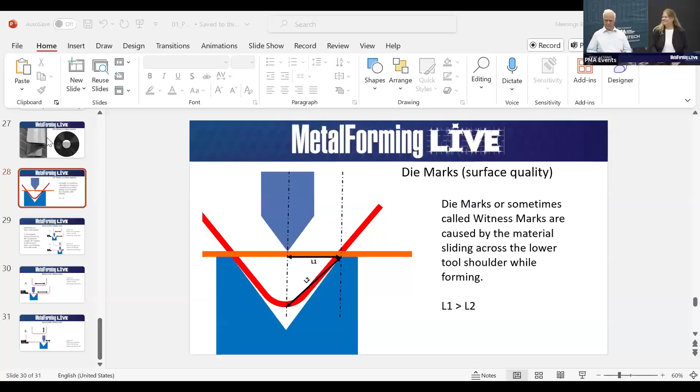Here today, we're going to outline some challenges fabricators have to take into consideration when assessing recipes for successful bending solutions. The first and most important is the V opening.

Too wide of a V opening causes excessive spring back, and more importantly, causes excessive spring back variations. A too narrow V crowds the die and exaggerates the typical metal thickness variations. The additional force needed also can overload the tooling.

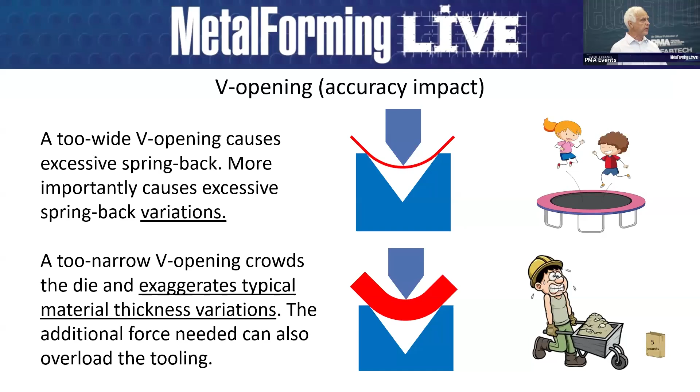The minimum V opening of 5 times metal thickness and the maximum V opening of 12 times metal thickness must be respected for good bending results. The ideal V opening, or the sweet spot, is about 8 times the metal thickness, or for 1/4 inch plate, about a 2-inch V die.

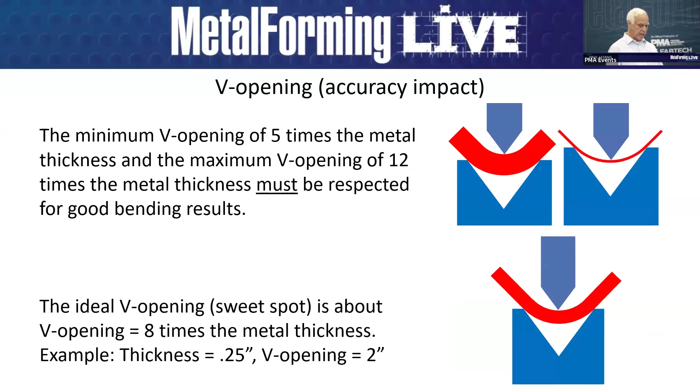Excessive force concentration can compromise the bending performance by the upper punch partially penetrating the material. In extreme cases, the machine or the tooling can be damaged.

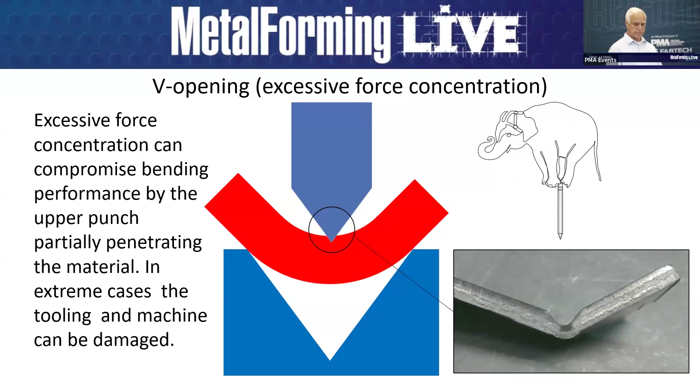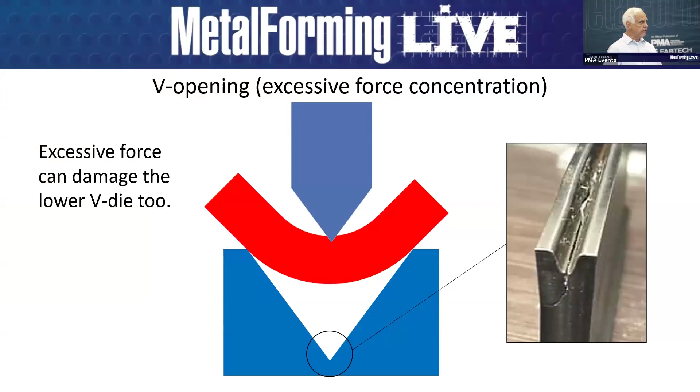Examples of some damaged tooling. Tooling tends to fail in the weakest spot, which is generally at the bottom of the V. And here you can see a die has been split by overloading.

Flange length. If the flange length is too short, the part can slip off the die shoulder and possibly damage the bend part beyond repair. Also, more importantly, the part can be ejected into the machine operator.

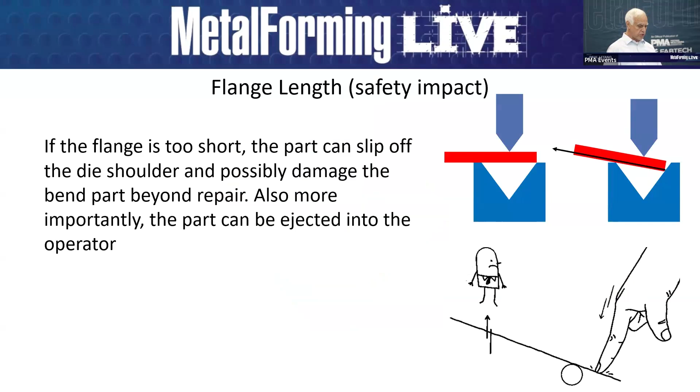Although the minimum flange is about half the V opening, a safety margin is needed to guarantee the part does not slip into the V during forming. Typically, the minimum flange for 90 degrees is about equal to the V opening times 0.77.

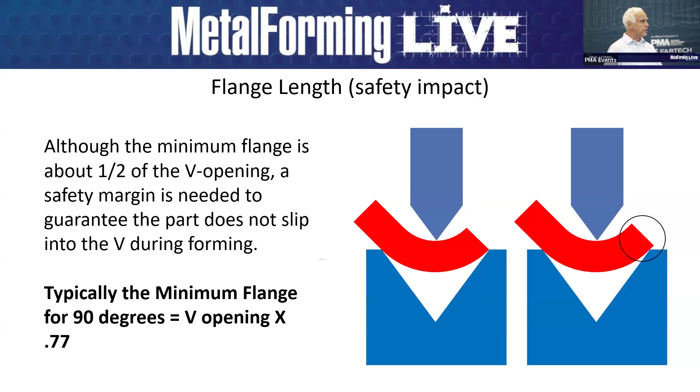Holes near the bend line. This is a very common problem today. Any cutouts inside the V opening are likely to deform, so-called blowout, during forming.

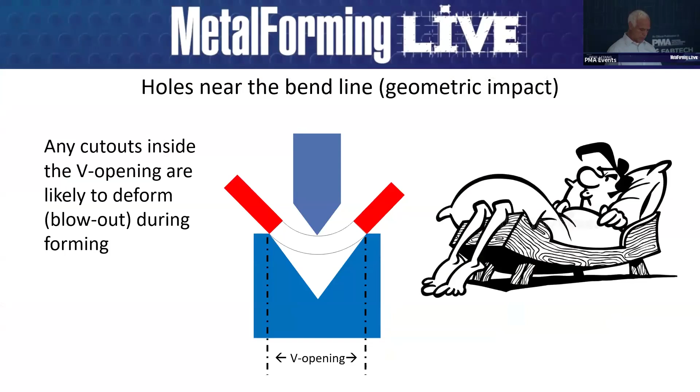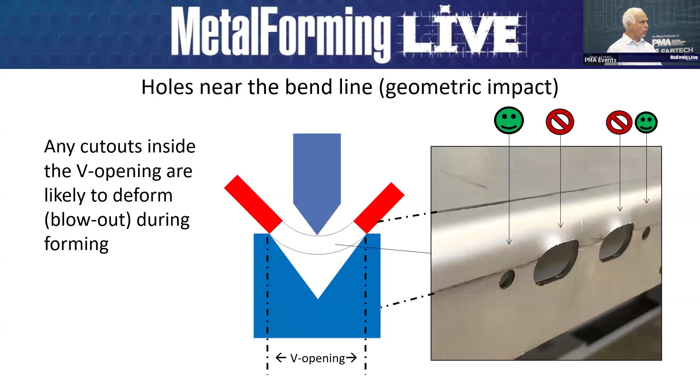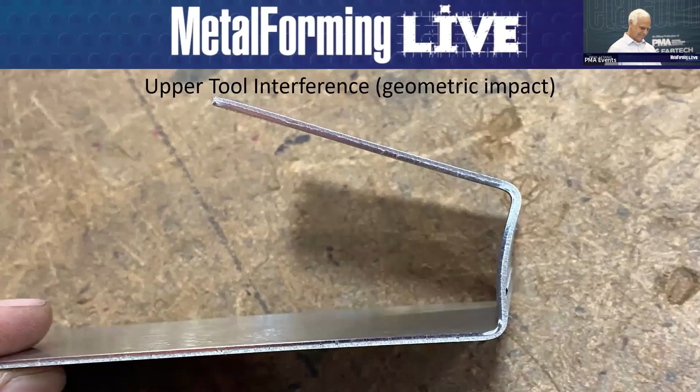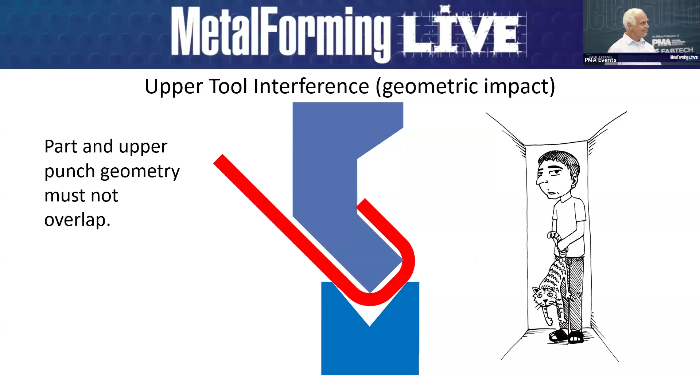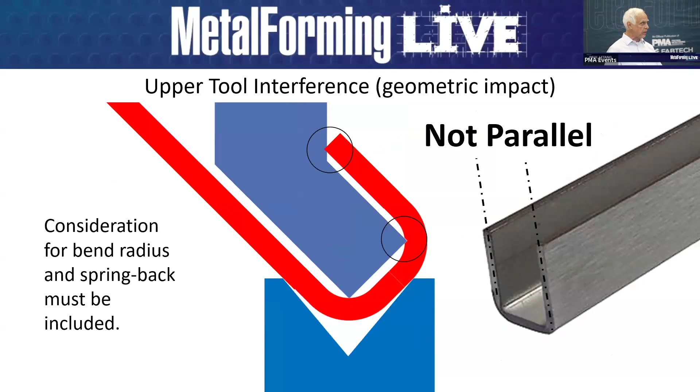Upper tool interference. Part and upper punch geometry must not overlap. Consideration for bend radius and spring back must be included. On the right here, if the part is touching the punch, the bend part will not be parallel after forming. Be aware that similar deformations can be caused by bending too fast.

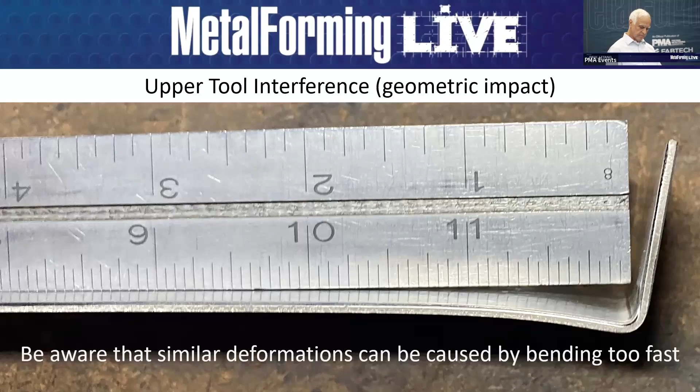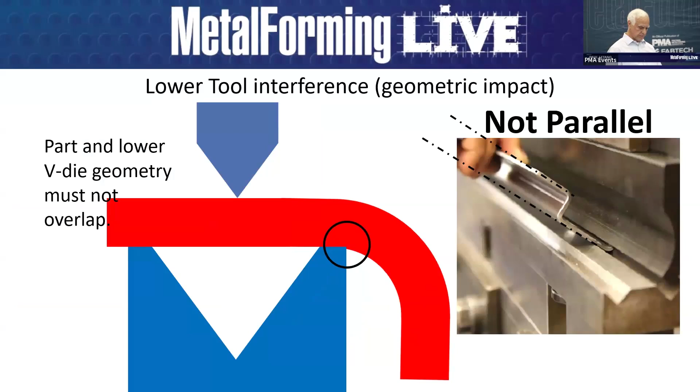Lower tool interference. The part and the lower die geometry must also not overlap. Here in the example, you can see the die shoulder penetrating the piece part, causing the Z-shape flanges to be non-parallel. Be aware that similar deformations can be caused by gauging errors.

When the offset or the Z-shape is less than a half inch, an old school solution of a unique hard tool is likely required.

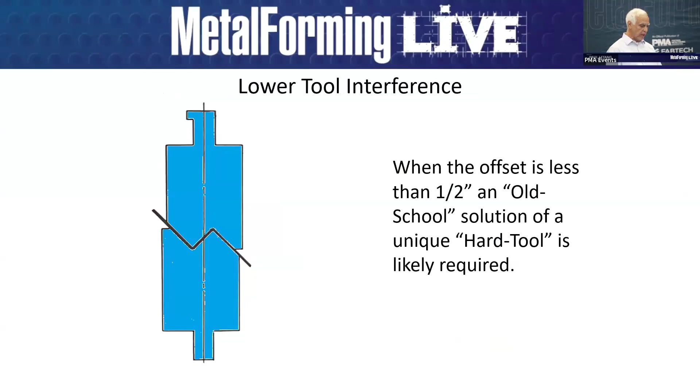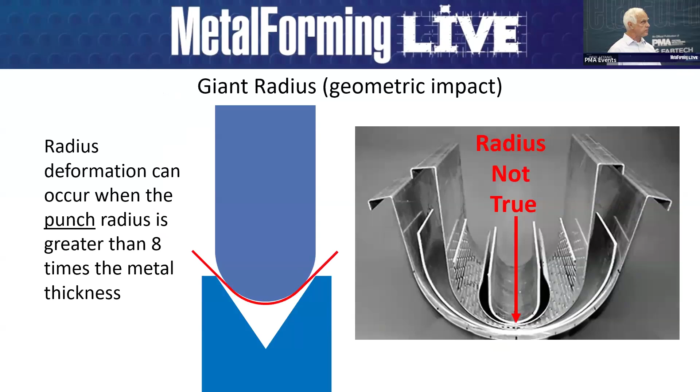Giant radius. Radius deformation can occur when the punch radius is greater than 8 times the metal thickness. Leverage between the punch radius and the die shoulder causes the material ahead of the tip of the punch to deform.

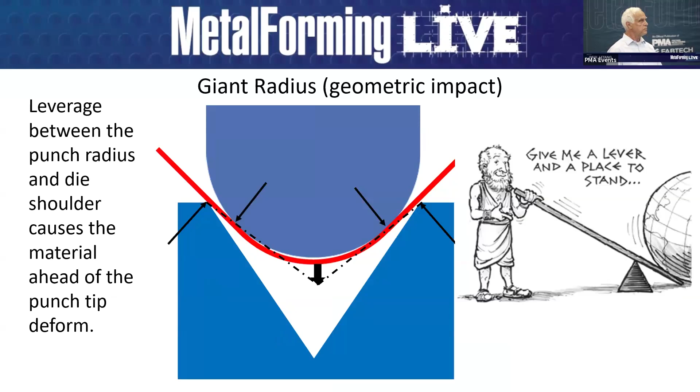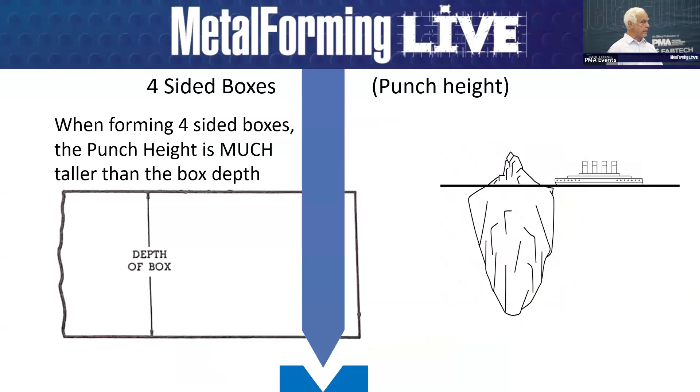Four-sided boxes. When forming four-sided boxes, the punch height must be much taller than the box depth. Punch height must include the box depth with the final bend at 90 degrees. Some additional height to clear the ram must also be included.

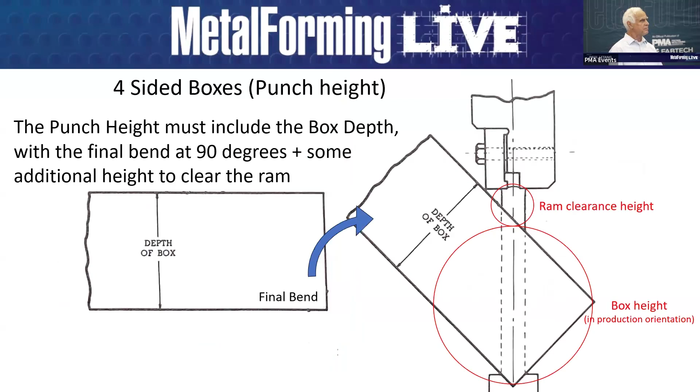The formula for punch height is equal to the box depth times 1.3 plus an amount for the ram interference, as shown in the red on the upper right.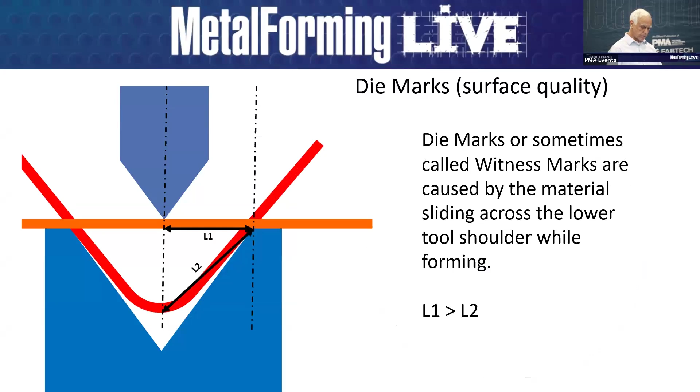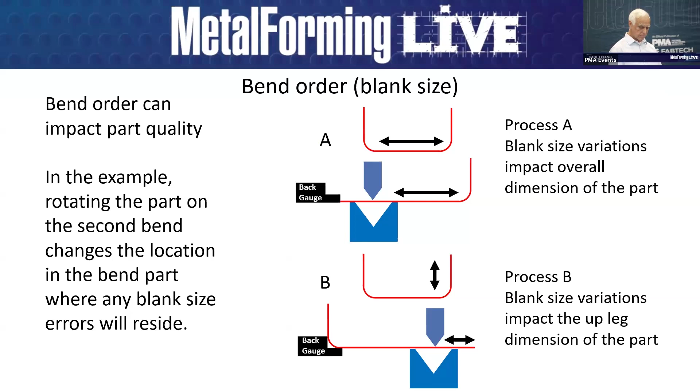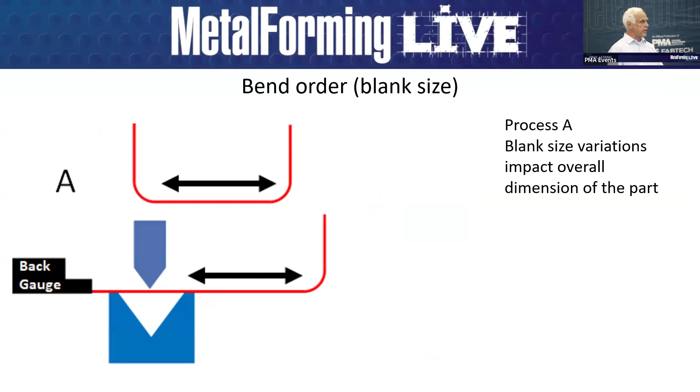Bend order can also impact part quality. In this example, rotating the part on the second bend changes the location of where the blank size errors reside in the part. In Process A, the blank size variations will arrive in the cross section, or the bottom of the piece part.

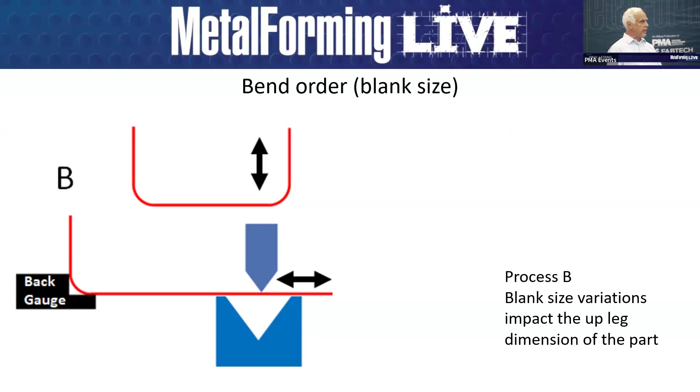Wow, that's really fantastic, thank you so much, Paul. You're welcome, you've learned a little bit over the last few years, haven't you? Maybe one or two things. One or two. Really, really amazing. So, excellent best practices and warnings about mistakes and so forth.

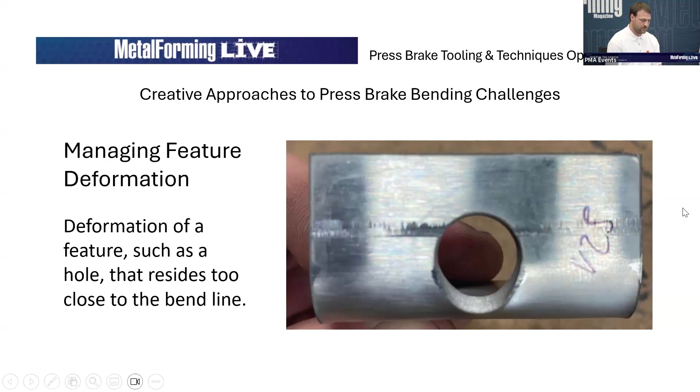The first solution: if you have a hole, you can reduce the hole size itself in the blank. This needs to be done before the part gets cut. If you reduce the hole size, you're going to reduce the interference in the blank and the die space. And if you do have some small amount of deformation, when you drill it out to the correct size, you're going to remove most of that deformation.

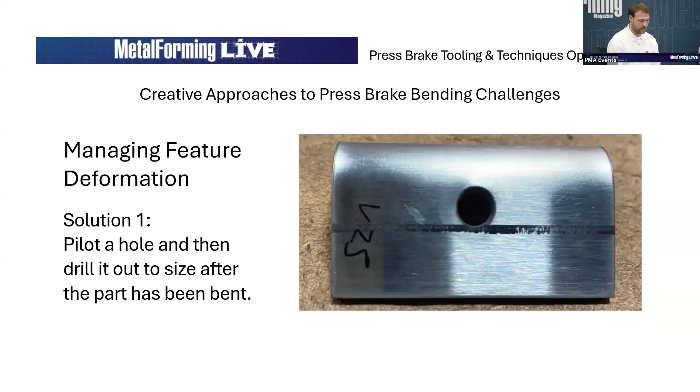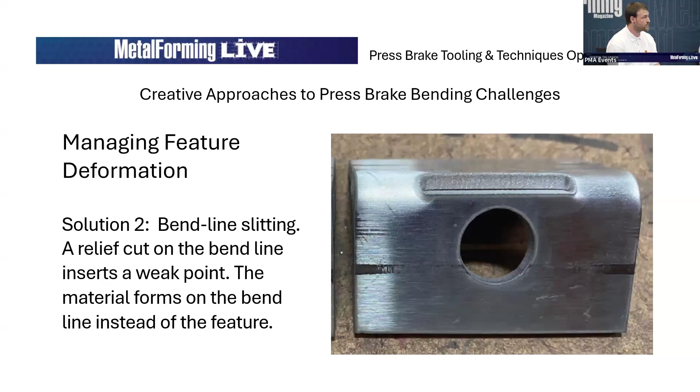Another excellent way is to use bend line slitting. This is essentially a relief cut that creates a weak point in the material. This keeps the feature from deforming because the weak point is right on the bend line. Sometimes you can also use this if your tooling is too short and you don't have enough tooling; you can put some slits in order to reduce the number of bends you need to make, and you'll also lower the tonnage. So if you need too much tonnage to form the part and your machine doesn't have that, you can put these slits in.

Another option is to go to a smaller V opening. These smaller V openings will also reduce the interference in the die space, but likely they're not going to completely eliminate it. You can probably step down a size or two, going down to about 5 times material thickness.

That's about as small as I'd like to go. You can also, if the die is too small for your material, bring it up a couple degrees and then go into a larger die. Since you already have a little bit of a bend on there, it'll kind of pull around a little bit.

But you do have to worry because they will deflect. The blowout there will push your tooling around. So you need to make sure your tools are tight in your machine and that you're holding your part correctly.

You're also going to lose consistency. Going to a smaller V opening is going to increase the spring back. It's going to create worse tooling marks. It's going to increase the tonnage.

And the tooling geometry really matters. A larger shoulder radius is going to slip a lot more. In an acute die, your part is likely going to slip a lot more.

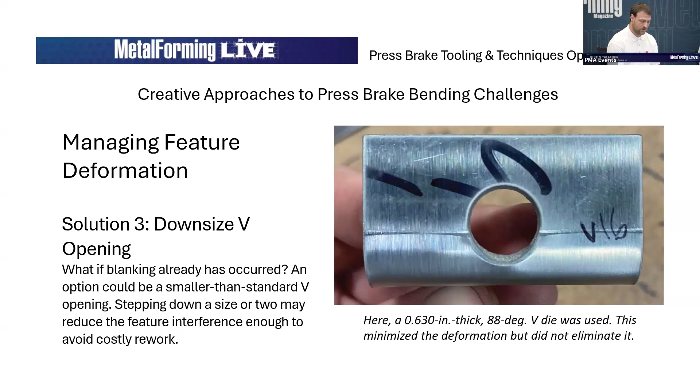The nice thing is they also reduce marking, and you don't have another post-process to have to do after the fact, like drilling out or welding a bend line slit if you can't have a slit.

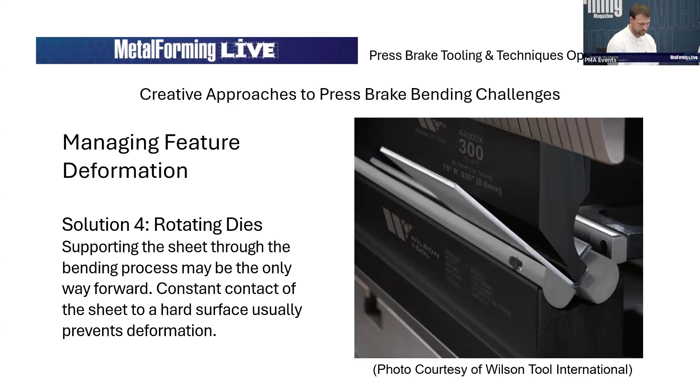Don't have a cam rotary die available? What about trying to use a sacrificial backer? Using a sacrificial backer, you can place a piece of material that is hopefully the exact same material, grade, temper, etc.

And in doing this, it can help bring around short flanges or holes that might otherwise blow out. It works best on smaller features. If you have a really long feature, that's probably not going to work.

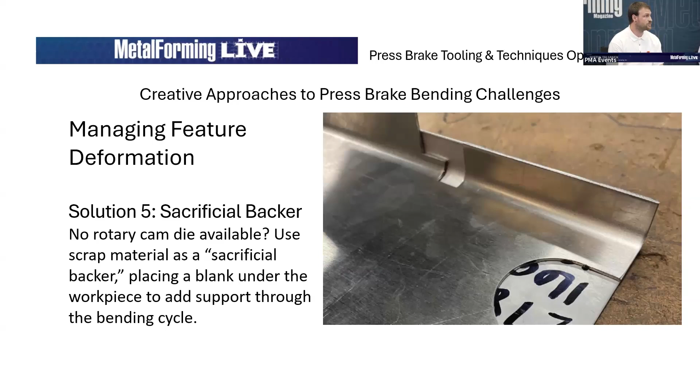And you also have to keep in mind that the backer material is deforming as well as your part. So as that part deforms, say like the small little window we have there, that's going to put pressure against the backer material. If the backer material is too soft, that part will cut right through the backer.

How about holes that are not just holes, but windows or maybe interesting shapes, miters, radii? All of these are also going to blow out. So we need to find a way to deal with that.

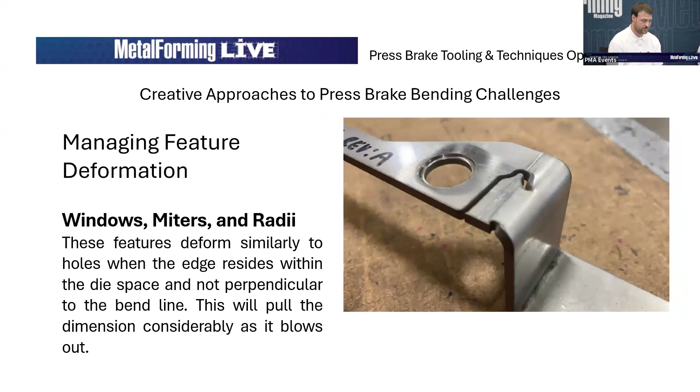One way to deal with that is to basically unslit, tabbing the material in. You can also call that silhouetting. These are terms for feature lines that are not cut to keep the skeleton together.

This will keep the support during forming because there will be material. And then after the material is formed, you can go back and cut that material out.

For a window, you may need to leave a little space, since it might be difficult to get in. We can also, for miters, which tend to twist the part as it's forming, leave extra material tabbed on so we can form it and then cut that extra material off, as I have here in this example.

Sometimes adding that extra material is twofold because you're adding distance to the back gauge. If we had cut that miter, you'd only be gauging off a small section, about 2 inches there.

But by adding that extra material on, you're increasing the width, and so you've now got your back gauge further apart, and it's going to increase your accuracy.

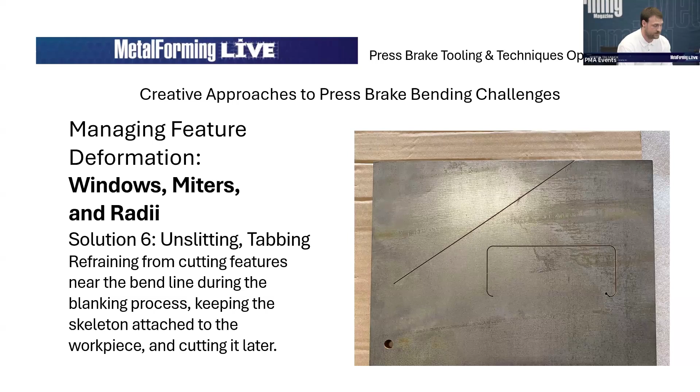How about machined surfaces? Machined surfaces are very interesting because you need a blank to take up the empty space. If you were to bend this without that blank in there, the punch would never contact the machine surface and it would blow out.

If you put a blank on the top, it's going to act as if it were a wrapper on the punch, changing the radius of your punch. If you put it on the bottom, it's going to act as if it were a sacrificial backer. Both of these support the material, but they support it in different ways.

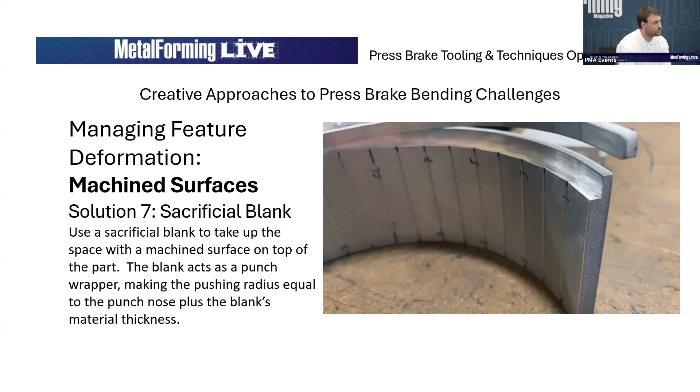You have to think about how the elongation rates may differ. In the material where the entire material is together, the elongation is going to be different than the area where the material has been machined away and used a sacrificial blank.

Hiding in plain sight: deformation occurs along the material edge. Some of you may have noticed this as you're bending pieces, that the edge blows out. This is because of the Poisson effect, as they call it. Essentially, imagine a rubber band. If you were to pull a rubber band longitudinally, it's going to expand.

As you pull a rubber band longitudinally, it will expand, but latitudinally, in the center, it will compress. This also happens in forming material. The blue line I've drawn here is the neutral axis. Everything to the inside of it is going to compress. Everything to the outside of that blue line is going to expand.

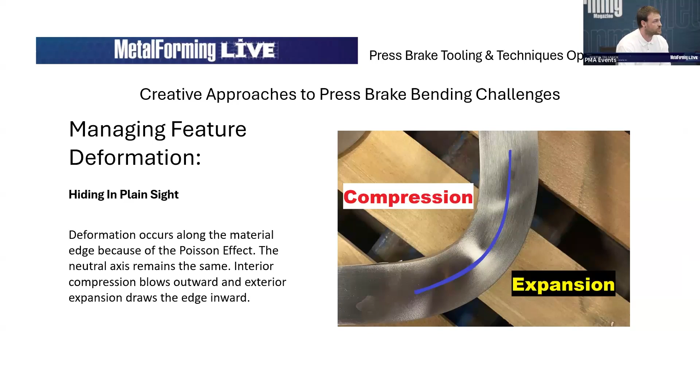As that compression occurs in the longitudinal direction, it is going to create expansion in the latitudinal direction, as you can see here. I've tried to draw that blue line there to also indicate the neutral axis, but it did take over a lot of the space, so I have another picture right there. You can see the side of the material blown out on the interior of the bend. On the exterior, it has compressed inward.

This can cause issues if you're using a side gauge, because that blown out area is now going to affect what you're touching. An easy way to avoid that is to put a shim on the side gauge.

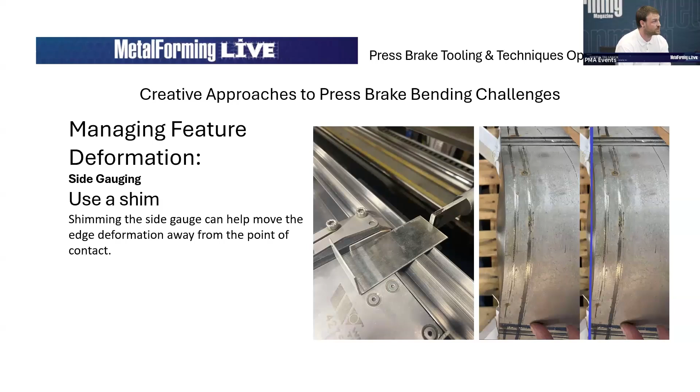Moving on, let's go to bending large radiuses. If you need to bend large radiuses, like profound radiuses that are 10 or 20 times the thickness of the material, or you need to bend transitions, such as for the HVAC industries, food and beverage industries, you're probably not going to want to buy a very specialized tool unless you make that part all the time. Why? Because if you make that part all the time, you can afford the tool. But if you're only making one or two, such as in the situation of a high mix, low volume shop, you're not going to want the tool to sit on the shelf.

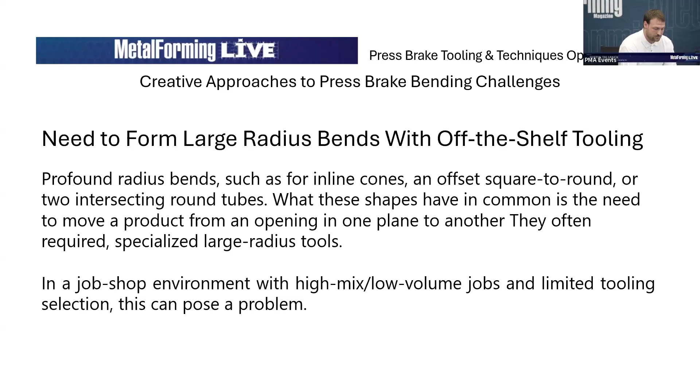Step bending is going to require tribal knowledge from your shop. You're going to need a skilled operator, and you're going to need the right product mix. Sometimes you can use multiple of these techniques in concert. Here we have a bend line slit in the corner. This slit helps allow the material to come around.

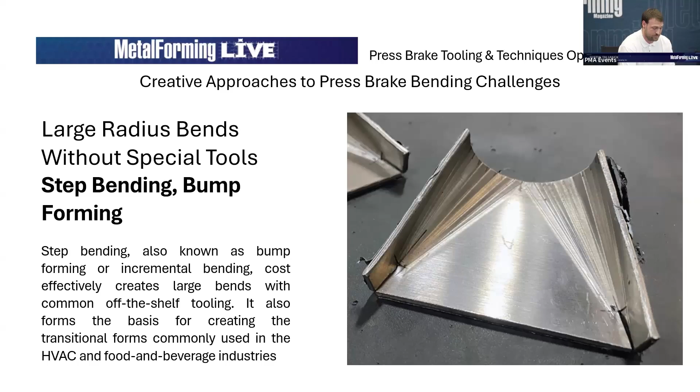Here we're doing a series of small bends. These small bends are in close proximity to each other, but they're not going to make up a true radius. Instead, you're going to have a series of flat segments, which will be slightly visible on the inside, though they can be polished out. You really won't see much on the outside, but you might see a little bit of a flattening step. The distance between these bends is called radius pitch. The smoothness of the bends is going to be dependent on the number of bends and angles you have. The more bends you have, the lighter the angles, the smoother it's going to be. The opposite will make it very choppy.

Sometimes you'll want to do a choppy bend because it's just about getting it done, getting it through, but sometimes it needs to be very smooth. Often you need a smooth flow of product to prevent buildup, such as in the food and beverage industry.

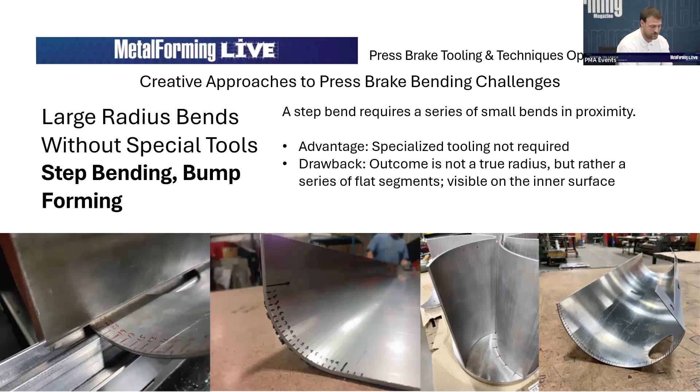Here we have some calculations. The calculations are going to be basically determined by the person running the job. You can do two different calculations here. The arc length divided by the radius pitch will give you the number of bends in your step bend. This is a great way to bridge the die gap if you want to ensure that your material crosses the die and does not fall inside.

Another way is to ensure that the bends are very soft and have a smooth finish. You can take the total number of degrees and divide it by the degrees per bend, and that will give you the number of bends. So for example, if you'd like a smooth finish on 12 gauge stainless steel, you might want to go with 2 degrees per bend, or you might want a radius pitch of 1/8.

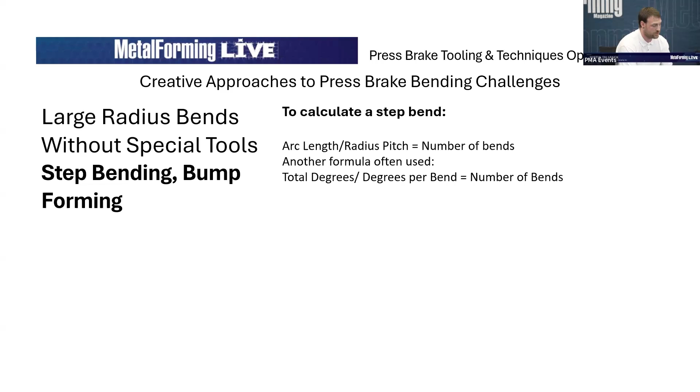Workaround number 1 would be allowing the workpiece to fall within the die opening to avoid choppiness. It can be very tricky to let the part actually fall within the die opening. This is because the penetration is going to be a moving target. As you bend the first bend, it will come up normally. But as you put the second bend on, the first bend will be inside the die opening. This makes it very difficult.

You'll have to go down further, and it will continue on all successive bends until all of the bends bridge across the die, at which point you will be hitting too hard and you will have to lighten back up. This can be very difficult to do.

Another workaround is using a strip of urethane to take up the volume in the die. Often, this strip can help create support and have a very, very small radius pitch because there's constant contact. It's also very helpful to draw a black line straight across the urethane. Helps you line everything up.

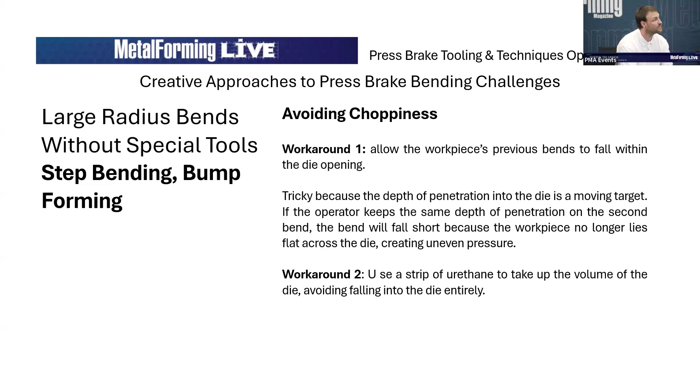Here we have to look at what's occurring when we're actually checking our segments. In blue, I've drawn a radius for a radius gauge that we're using to check our bends. And on the left, you can see that the radius gauge will not go all the way down to where the part is. It's going to be held back away and it's going to look incorrect.

So one of the things you can do to draw the material into that radius gauge is you can cheat the angles. If you cheat the starting and ending point angles by half a degree, it will help draw that in, but it may parabolize the shape of the radius.

That's the center. On the right, I have instead chosen to cheat the starting and ending points instead, keeping the angles the same, but cheating the radius pitch by half. This helps to move the interference point to where the start and end actually need to be.

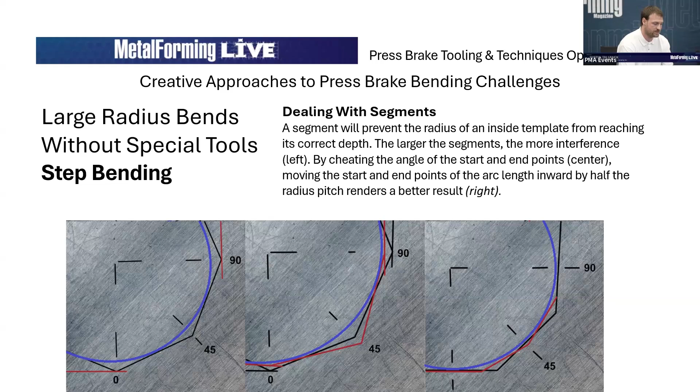Step bends magnify errors. If you have a half a degree error on your bend, and you put 10 bends on the part, you now have a 5-degree error. If you're putting 45 bends on a part, that error is going to be tremendous.

You need to take the time before doing a step bend to ensure that the part is going to be good, straight, accurate. You're going to prevent canoeing, and you need to potentially get some test material. A test material from the exact piece that you cut, usually scrap or drop that comes off the sheet, is usually best because sheet to sheet variation could be an issue, especially with the stacking errors.

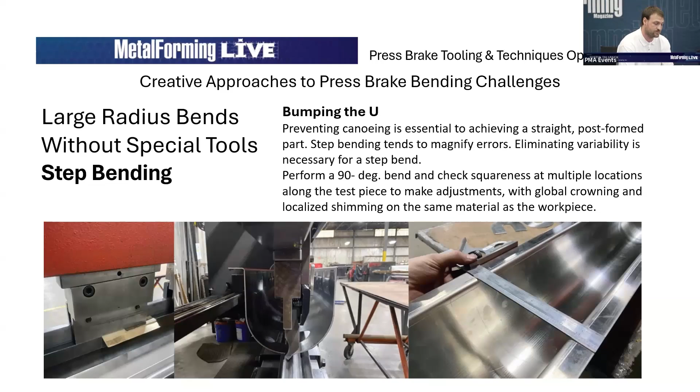This is all about finding balance though. Sometimes a process may be better or worse depending on the shape of and cost of the part. Adding a process takes time. If you have one part to do, any process is probably fine. If you're doing 100 parts, you might not want to spend the time drilling them all out. Designers and manufacturers need to work together to salvage parts that would otherwise be unusable, and hopefully work on it before it gets to the shop floor.

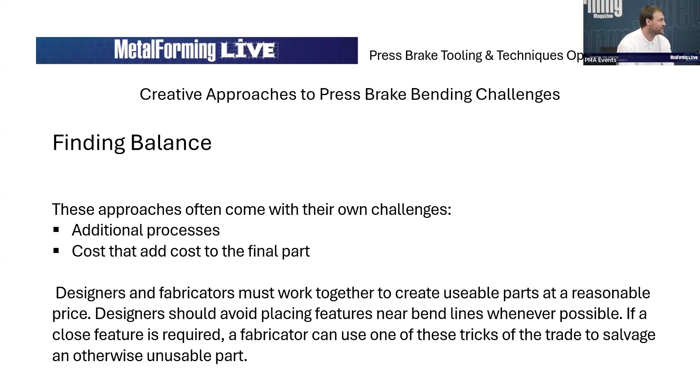Fantastic. Thank you. Fantastic, Justin. Thank you so much. That was amazing. Thanks.

And how many of those workarounds and creative approaches did you devise the hard way versus the easy way? Well, every single one, I'll say. I definitely run into every one of those issues, and they're difficult, and it took me a long time to figure a lot of them out. I certainly didn't come up with them. I found them through trial and error and other people, other mentors teaching me how to do that, and excellent tools from Wilson Tool that have obviously helped me along the way.

Awesome. Excellent, excellent creative approaches. Well, we have a lot of questions. Some of them might be for Paul. I missed them before, but Brad, why don't you go ahead with those questions? Alrighty. Yeah, and thanks. Keep them coming, everybody.

Yeah, specifically for Justin, with the press controls today, can you program in the high radius and the number of steps when you're doing the large radius step bending? Yes, you can. One of the issues is, again, if the bends actually fall within the die width, the calculations will be incorrect because you're going to need to add a bunch of corrections. But if you're staying outside of the die width, those actually work pretty well for the most part.

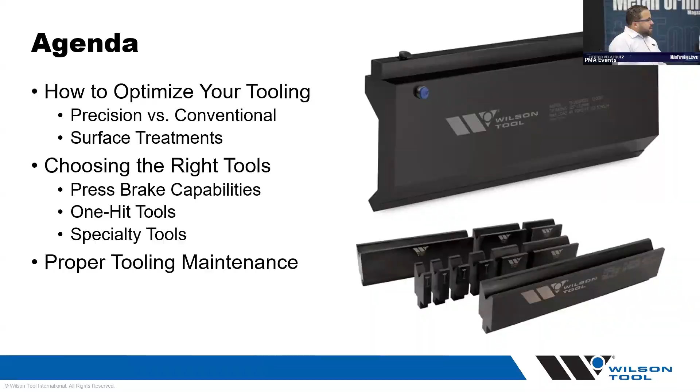One of the things that I always recommend to customers is that whatever they put in place, make sure that it's simple, because otherwise it's going to be taken as something cumbersome or additional work, and the employees may not follow through with it. So let's start with how to optimize the tooling that you have. One of the things that we always advise is that you should use the tools for the correct bending application.

I understand that there are going to be instances in which you may need to cheat a little bit, but you don't want that to be the norm, because your tools are going to wear out faster. And the worst case scenario, if you're using too thick of material in a small V, you can break it. And based on the age of that tool, the material may kick out, or pieces of that tool may shoot out and injure the operator. So always make sure that the right tools are used for that bending application.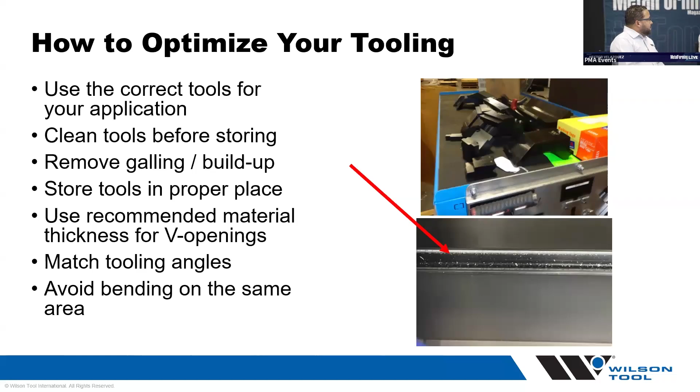Another big one, and this is applicable for all tools, whether it is precision tooling or conventional tooling. If you are bending smaller parts, make sure that you're moving to the right and to the left of the die. What happens is a lot of times we just want to hit our numbers, right? We have to bend 1,000 or 200, and the operator just bends in the same area over and over and over. It's not going to happen tomorrow. It's not going to happen next year, but over time, you're going to start wearing that area at a greater speed than the rest of the die. So what I recommend is you move to the right and to the left, and that helps with the longevity of that tool.

So another question that we get asked a lot is, when do we choose precision versus conventional tooling? And usually what I tell customers is: your tolerances, do you have to be right spot on? Or is this something that you have a long run, or is it a short run, right?

If you find yourself having to hold tolerances that are very tight, and you have to make thousands of parts that have to be just right, or even if those parts are going to be assembled with other parts and go inside bigger boxes, precision is going to be your best friend, simply because you can hold that precision, and you're going to have consistent parts from one to another.

Another benefit of precision tooling: it happens, you're going to break a tool. If that happens, the precision is going to guarantee that you can buy another one and it's going to match. You don't have to worry about that.

However, if you have conventional tooling, it is impossible to match because it's made with a planer. So if you break a conventional tool, guess what? You're having to buy the entire length again.

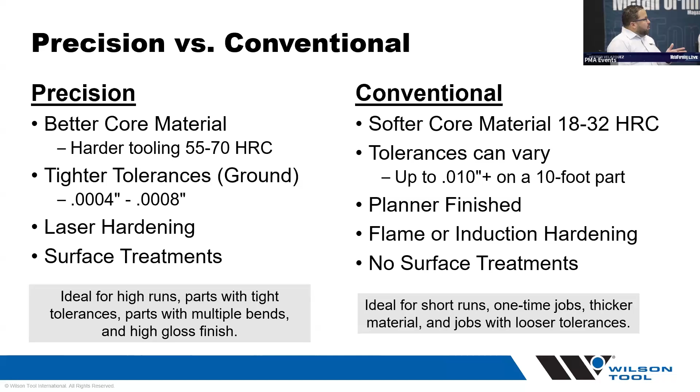But there are some instances in which conventional tooling is applicable, on the heavy bending side of things, or if you have to do just a few. I don't have the tooling, Hector, but you have to do a few, and then you just have to say, okay, the conventional tooling, it's going to work.

Along with the precision tooling, not only is it going to give you the longer life from being able to hold tolerances, it also is going to help with the longevity, because usually they will have some sort of surface treatment. And you might be asking yourself, why is this important?

If you live close to the water, if you live in a place that snows a lot, there's high humidity, condensation inside the building, it can build on the metal of the tools, and they can start creating that brown rust that if you don't remove it, can be detrimental to the tool.

So having some sort of surface treatment is not only going to help in avoiding the corrosion, but it also can help with the lubricity needed.

Sometimes whenever you are bending something like galvanneal, one of those materials, the coating tends to transfer onto the punch tip or the shoulders of the die. The lubricity from something called Nitrex, which is what we put on our tools, not only makes them harder, but also helps minimize the galling.

In addition to that, Justin, I don't know if you've experienced this: if the tool is just raw metal exposed and you have to hit the part too hard, sometimes it can get stuck on the punch and you have to hit them to get them out. Having some sort of barrier there will help minimize or avoid that from happening.

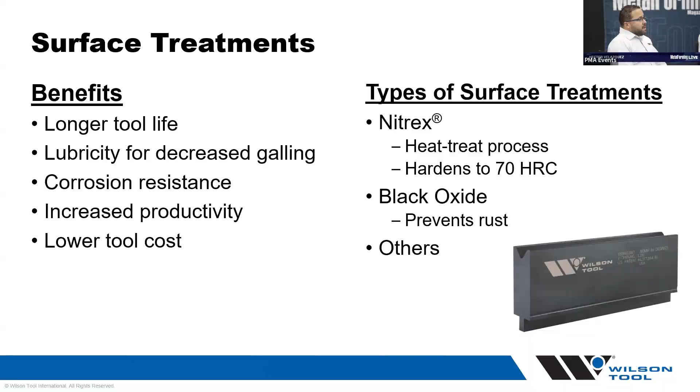All right, so the one question that we always get asked, not only from new customers but also from existing customers, is: what are things that I need to take into consideration when choosing the right tools?

And the first thing that you need to look at is the machine capabilities. Many times customers just say, I found this great deal online, this great machine. And then whenever you start having a conversation about the geometry of the part and what tools are required, you find out that, hey, your machine doesn't have what it takes for that part.

So the most important thing always is going to be tonnage. What is the tonnage required for the parts that you're trying to bend? In addition to that, depending on the geometry of the part, how much open height do you need? How much stroke is going to be required for you to get down to the bottom of the V? Also, the depth of the machine itself: how long can that part be, or how deep can I go into the brake to make the part? And of course, the length of that bed.

So always keep in mind and be mindful of the press brake capabilities, because sometimes you can go to a bigger die to decrease the tonnage, but it may not agree with the geometry that is being called on the print. Anytime you go larger on the V opening, your inside radius is going to get larger as well. So it may or may not work.

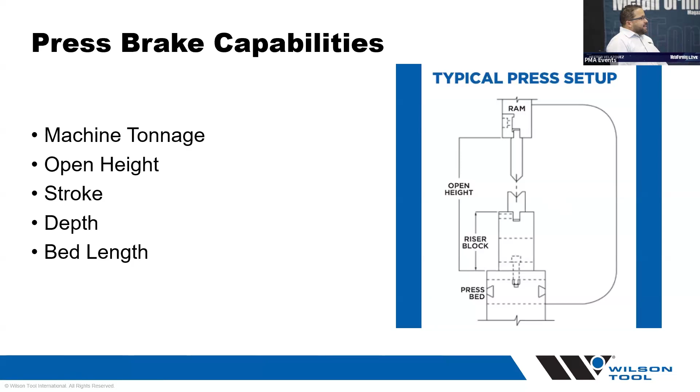The second thing to take into consideration is going to be the profile of the actual tool. So there are many questions. Number one, what is the bending style? Are you coining? Do you have a mechanical brake?

Are you bottom bending? Are you air bending? That's one aspect that you have to take into consideration.

In addition to that, what are the material type and thicknesses that you are bending, or the material type and thicknesses of the part that you need this tooling for? As you know, aluminum is a lot softer than stainless steel, so a different tip radius on that punch may be required to match the material thickness to avoid any cracking. As for if you're just bending stainless steel, it might be a little bit more robust or resilient, so you might be able to get away with what you have.

In the case of air bending, always keep in mind that the die is going to be the driving factor. It's going to pretty much determine what is the tonnage, also what's the smallest flange that you will be able to bend, and what inside radius you are going to end up with.

Aside from that, there are many profiles. If your material is very thick, you may need something like a block punch - all you need is just a hammer to drive down the material. But if you have a part like we see on the screen, not only is it a U or a channel, but it has a return flange going back in the front and in the back. So additional clearance is needed on the part and the height of that punch.

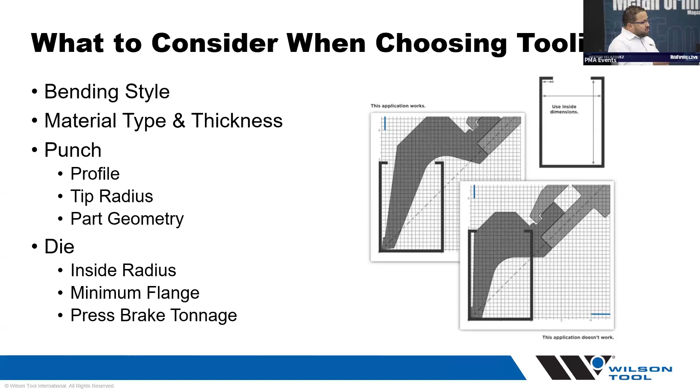This is something that we can help you identify. But again, before you take on a job, just make sure that you take the machine into consideration, as well as what are your tooling capabilities at the time.

Also, what about the part? This is the most important thing. Do you have parts like what we can see here on the screen? It looks very simple, but whenever you look at the form, you can see all the different flanges going in different directions. You have holes that are close to bend lines, and this happens to be a high running part.

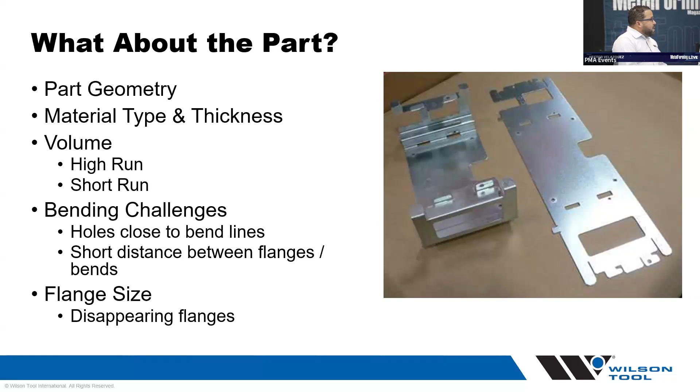So precision tooling was required for this, not only to ensure that you can be consistent, but also tooling that was going to avoid those holes close to the bend lines from deforming, and having sectionalized tools that will help the operator, or allow the operator to have different stations that they can move to the right and to the left without having to change or stop to change the tools.

Earlier we were talking about joggles, right? So if you have to make 1,000 of them a week, you may not want to hit that part twice. You may want a tool that you can just put in, hit once, and move on.

In addition to that, if you have a tool or a part that usually needs a punch press, and you don't have it - most shops today are pretty much going to lasers and press brakes, that's the norm - we can help you with tools to make forms that are usually done on a punch press.

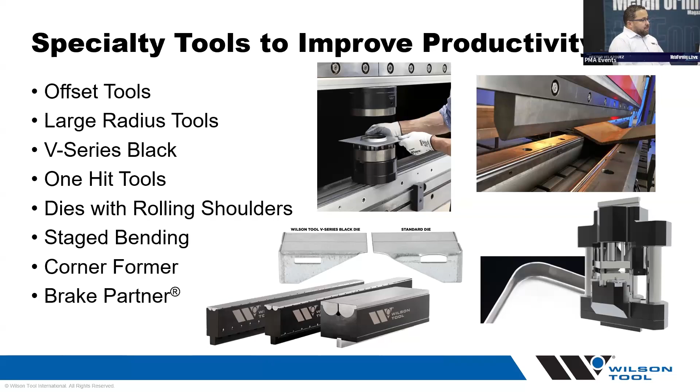Also, we have what is called one-hit tools. If you have a box or something that has several bends, we can make a tool or design a tool that you put the part into once, one hit, and you have a complete part. Again, this is just to ensure that productivity stays high, and we help you reduce the downtime.

Now, one thing that we recommend a lot when applicable is the use of staged bending. Earlier, Justin was talking about step bending or bump bending. There's also staged bending - what is the difference between them?

Well, stage bending allows you to have multiple setups at one time. It could be an offset, a 30-degree tool, a set of flattening tools - it could be many tools. And you can see this from two aspects.

If you have a shop in which there's a lot of tool changes, 3 to 5 per hour, and you have very short runs - 2 of these, 5 of those - you can have the operator go ahead and set up all the tools at once. Instead of having to stop in between jobs, they can just go ahead and do the first job, move on to the second one, and so on, keeping productivity high.

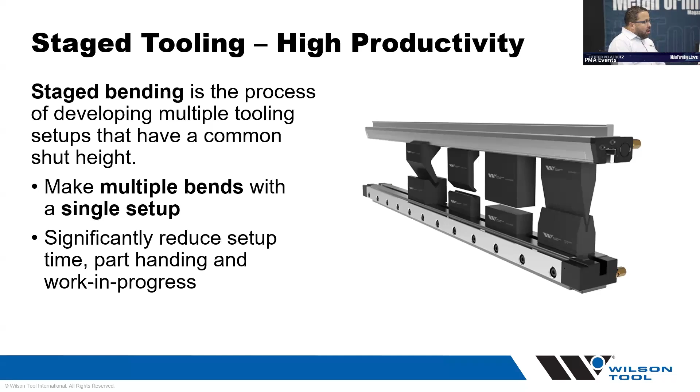In addition to that, if you have a part that is very complicated that requires different tools to be used, usually if you have 100 of them, you'd do the first 100 bends, stop, get the second setup, go to the second one, and so on. If you have the real estate on the press brake, you can have all your setups already there, and go first bend, second bend, third bend, and be done. If you're asking yourself, well, my parts are 10 feet long, stage bending is not for you, right? This is just for smaller, shorter parts.

So let's move on to tooling maintenance. A lot of times I'm asked, how often should I do this? There's not a specific answer for that question. It's all going to be based on usage. I would say every time you use your tools, you should do some sort of maintenance. Either it's going to be removing some galling, and we have some videos at wilsontool.com that show you how to remove that, or it could be removing the little metal shavings from the V.

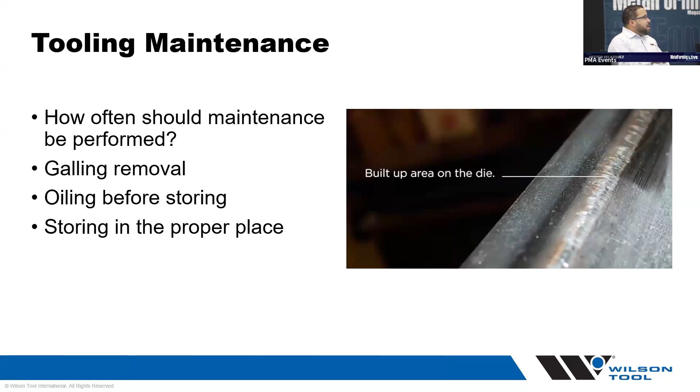Also, another big one when it comes to maintenance is if you live in an area that is close to the water, or have condensation inside the building, putting some sort of oil on your tools will create a barrier that keeps brown rust from forming. Also, a big one is storing your tools in the proper place. If you have tools with some sort of tang, a safety tang on the punches, such as American tooling and what we call WT tooling, we recommend you take a look at the safety tang itself to make sure it's not damaged or worn, and that the screw, the button that goes in and out, is nice and tight.

And that brings us to the end.

Excellent, really excellent. We were talking about this earlier, that every auto mechanic will tell you the right tooling will save a lot of time. I really liked your discussion of the specialized tooling, particularly the one-hit tooling and so forth. So we have a lot of audience questions, so I'm going to turn this back over to Brad. Go ahead with your questions, Brad.

Terrific, and thanks everybody for hanging in there and for asking all these great questions. We'll get to as many as we can. I'm going to go all the way back to Paul's presentation, you kind of glanced over this whole question of die marking, and I know everybody online with a press brake is dealing with die marks, especially on aluminum and stainless. Can you guys offer a few tips on how to deal with die marks, how to minimize or even avoid them, especially on aluminum and stainless?

Yes, so the most inexpensive way to take care of that is by utilizing urethane or a fabric drape that will keep the marking from taking place. If that is not enough, then you could buy a die with a bigger or larger shoulder radius that will also help eliminate the die markings. Okay, any other input on that?